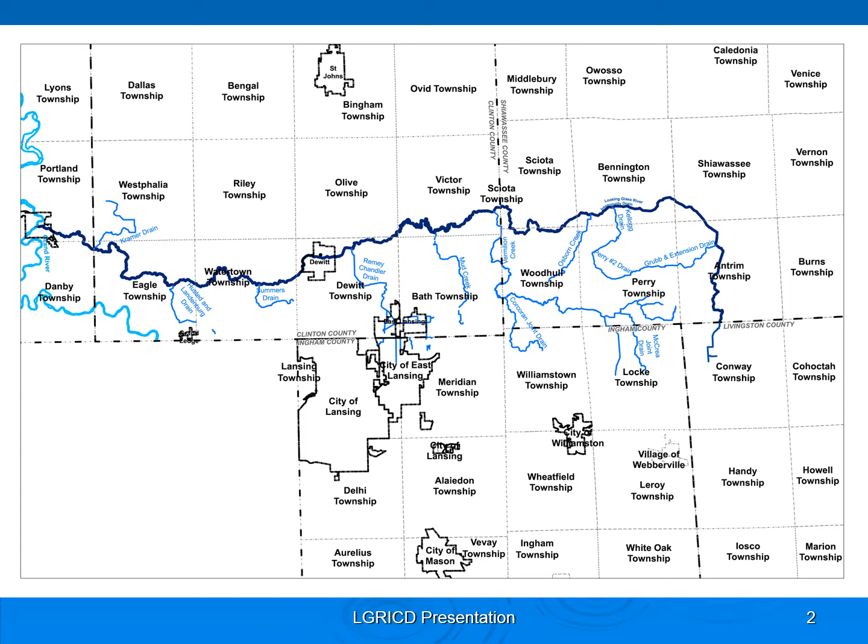The Looking Glass River runs from its headwaters in Livingston County to its mouth in the Grand River at Portland. The river is the outlet for numerous natural watercourses, county and intercounty drains, draining approximately 280 square miles in parts of 5 counties. The river is a resource critical for agricultural, residential, and commercial drainage. It also provides wildlife habitat and recreational opportunities such as kayaking, canoeing, fishing, and hunting.

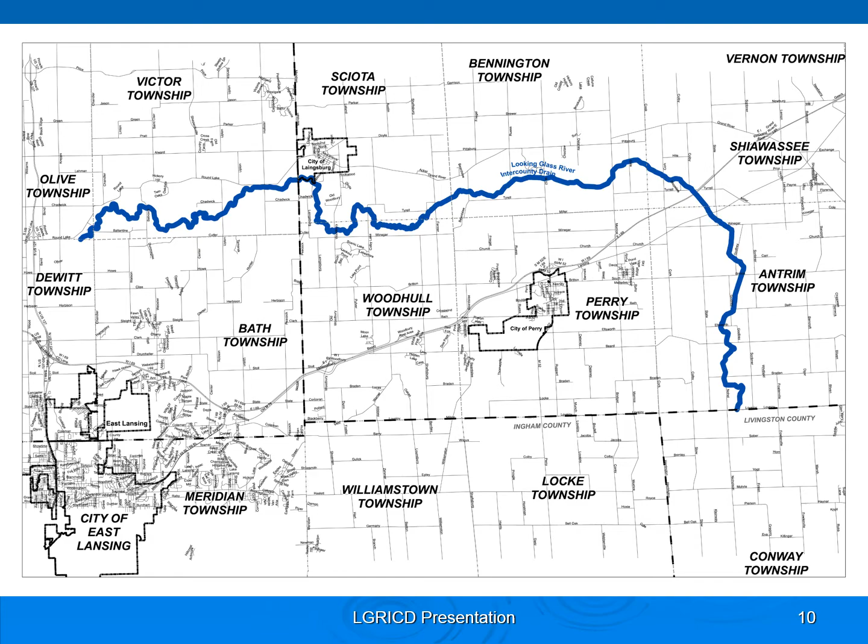The Looking Glass River Intercounty Drain was established by an 1886 order establishing improvements. It is 36 miles in length and includes the portion of the river from the township line between DeWitt and Olive Townships in Clinton County, upstream through Shiawassee County to the county line between Shiawassee and Livingston counties. Michigan's current law recognizes that drains established under prior law remain public drains.

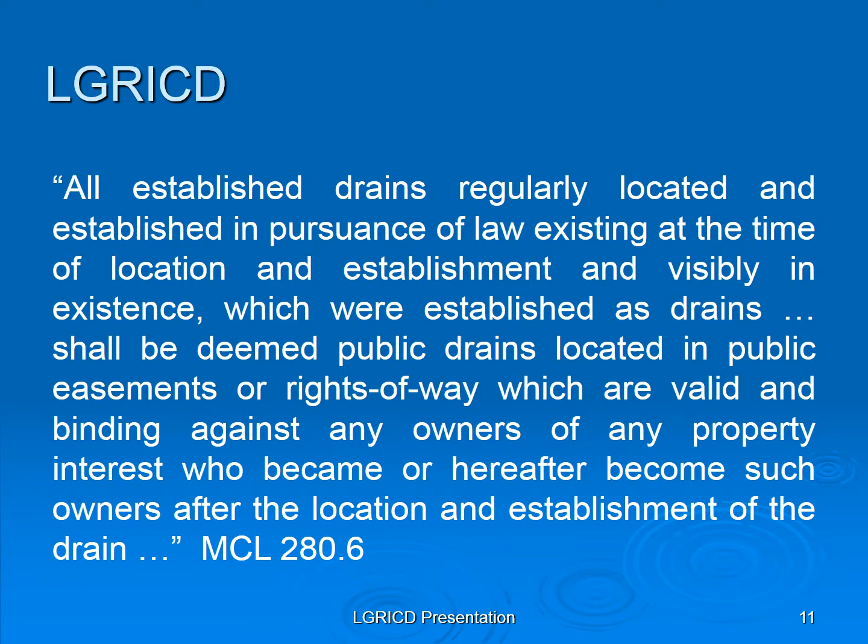The Looking Glass River Intercounty Drain is managed by a drainage board made up of a representative of the Michigan Department of Agriculture and Rural Development, MDARD, as the chair, and the drain commissioners from each of the counties having lands served by the drain. Since the 1880s, there has been a recognized need for maintenance activities on the Looking Glass River. Proposed maintenance activities resulted in a 1944 order establishing a drainage district boundary.

This map shows the drainage district boundary as established in the 1944 order. The boundary is much larger than the established portion of the intercounty drain, shown as the heavier blue line, indicating the need for a district boundary revision. The recommended changes to the district boundary correspond to the reach of the intercounty drain as it was established in 1886. What you see in gold or yellow are the areas of the 1944 district that are recommended to be removed. They are not served by the intercounty drain.

Blue areas are lands that actually drain into the Looking Glass River Intercounty Drain, but were not included in the 1944 district. The lands shown in blue are recommended to be added to the district. The recommended district is approximately 120,500 acres or 188 square miles and includes parts of Clinton, Ingham, Livingston, and Shiawassee counties.

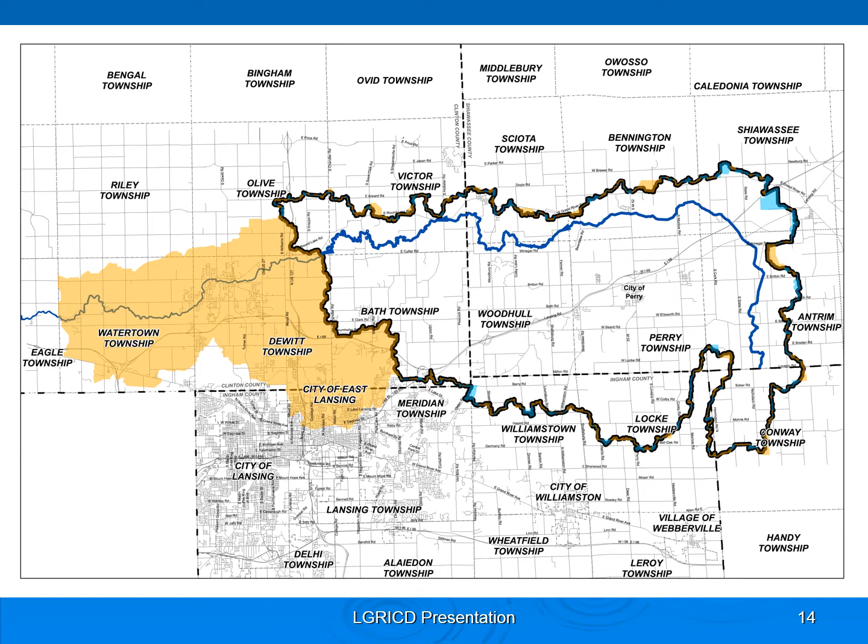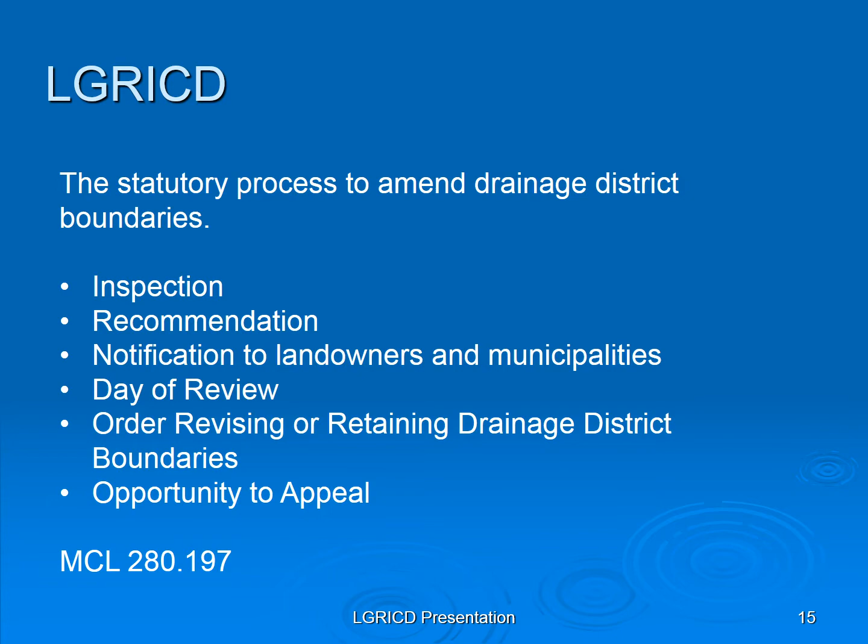When an inspection of a drain shows that the boundaries of the drainage district need to be revised, Section 197 of the Drain Code provides a procedure to accomplish this. In general, this procedure includes a recommendation based on available data and field confirmation, a notification of landowners and municipalities of a pending change in boundaries, a day of review, an order either revising or retaining the drainage district boundaries, and an opportunity to appeal the order.

Available data includes the use of current technology, mapping, and topographic information. This image shows a portion of the Looking Glass watershed LiDAR topographic data highlighted using a hill shading technique. This is extremely useful in understanding the lay of the land and direction of water flow. The red line identifies the ridge line or drainage district divide. The heavy blue line denotes the river. The lighter blue lines the tributary drains.

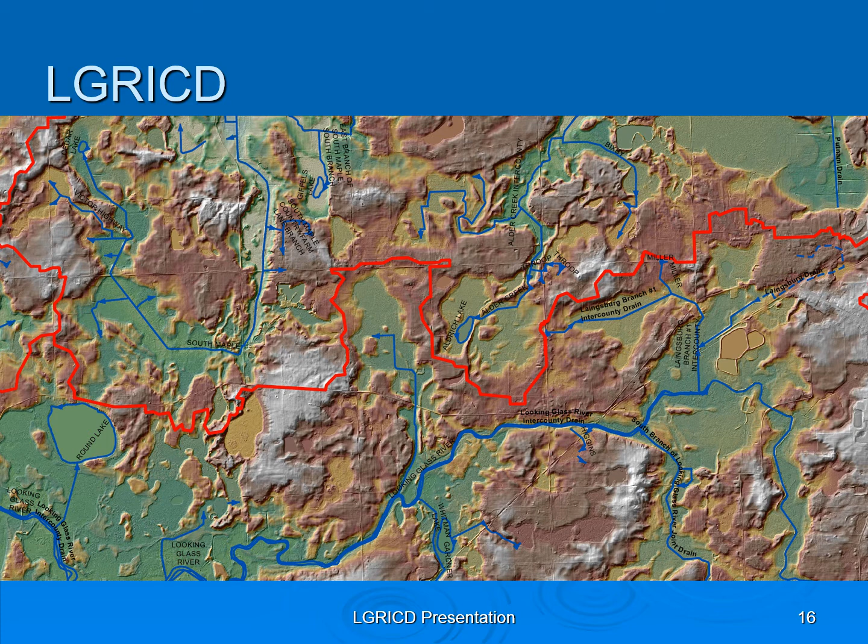Once a preliminary district boundary is identified using available data, it is then confirmed or truthed in the field. A visual inspection determines if there have been local factors that affect the drainage patterns and flow of water near the boundary. These could include such things as structures, earthwork changes, or road building and culvert installation.

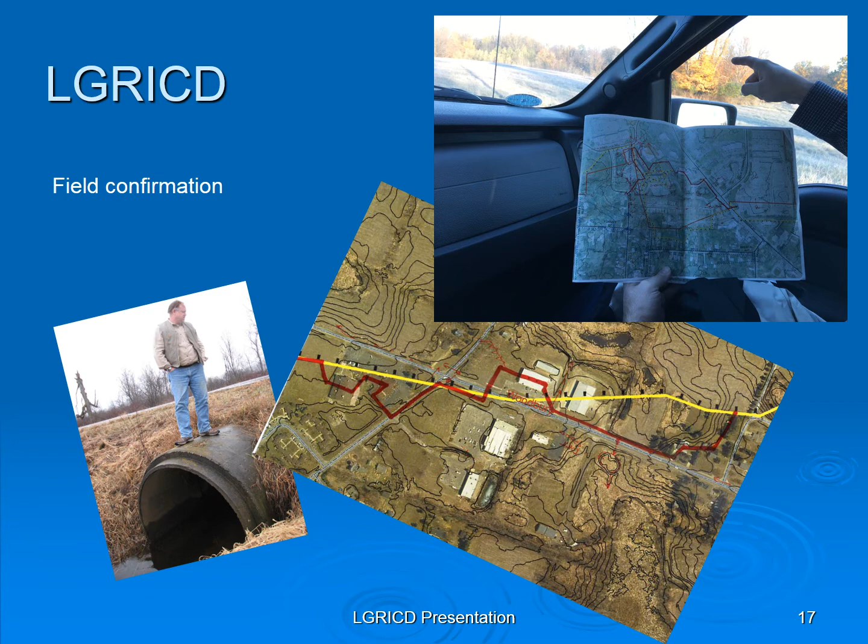Once a boundary recommendation is made, the Drainage Board issues a notice of a day of review of district boundaries. This notice is sent to each of the municipalities and landowners within the district. The day of review of drainage district boundaries provides the landowners with the opportunity to provide input and participate in the decision-making process and share information and local knowledge about the lands involved.

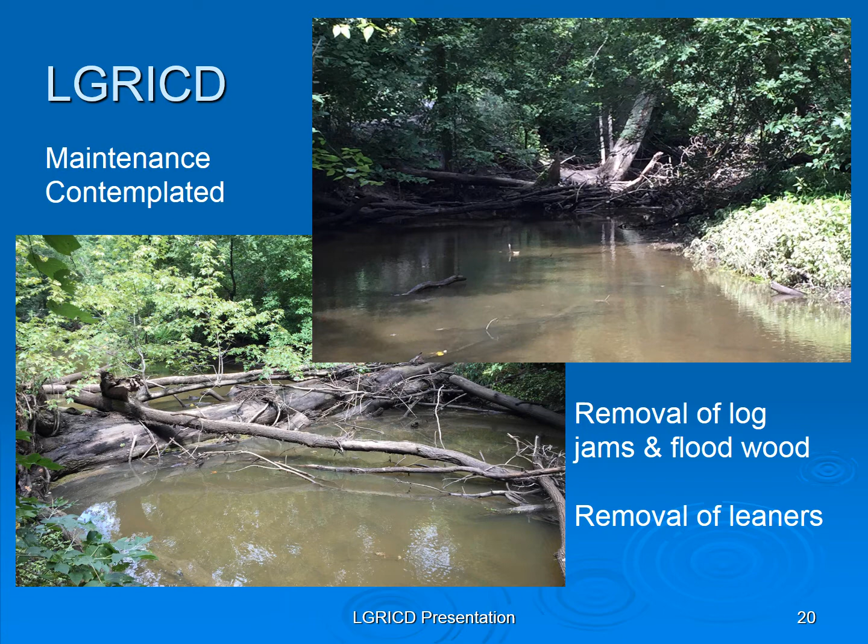Certainly, the condition of the Looking Glass River Intercounty drain indicates the need for maintenance, and maintenance is contemplated. In fact, it has already started. It includes removal of the log jams and fallen trees to allow for the free flow of the drain, and removal of leaners, or trees that will someday fall into the drain. This reduces the need for future maintenance. The first maintenance activities started on a 9-mile reach of the drain in Shiawassee County from near I-69 downstream to Fenner Road.

The work of volunteers is certainly appreciated, but is limited when it comes to the size and extent of log jams. Experience has shown that complete removal of log jams and floodwood improves the flow of a river, particularly at lower stages. It is not unusual to find flow dropped 12, 18, even 24 inches in the channel by removing log jams. In those instances, farm tiles and tributary county drains work more efficiently. This allows the land to dry out more quickly, improving agriculture, roads, and travel near the river.

During higher flows and flooding events, log jams, trees, and other obstructions have less of an effect on flows because the river is already flowing out of bank, through, around, and along its floodplain.

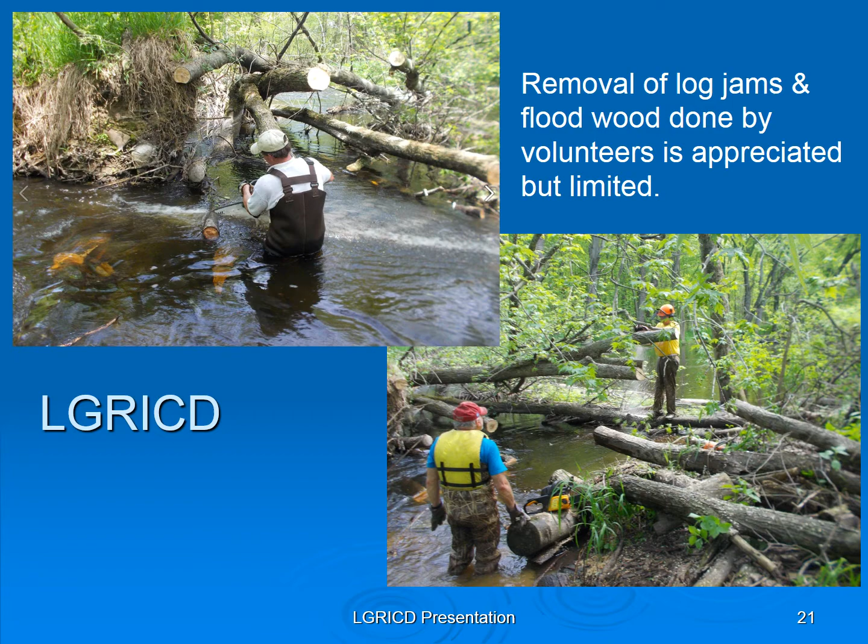Maintenance work bid by the Intercounty Drainage Board will generally be for work by contractors using larger construction equipment. Long-reach machinery, grapples, and similar equipment pluck the floodwood from the river and relocate it to areas where it will not re-enter the river. Selective clearing removes leaners and potential hazards and provides an access or maintenance way, but also saves many trees that don't present a maintenance or access problem. The proposed maintenance is not intended to clear-cut the drain's right-of-way. No excavation is proposed. No landowner or other petitions are required. No MDEQ permit is necessary.

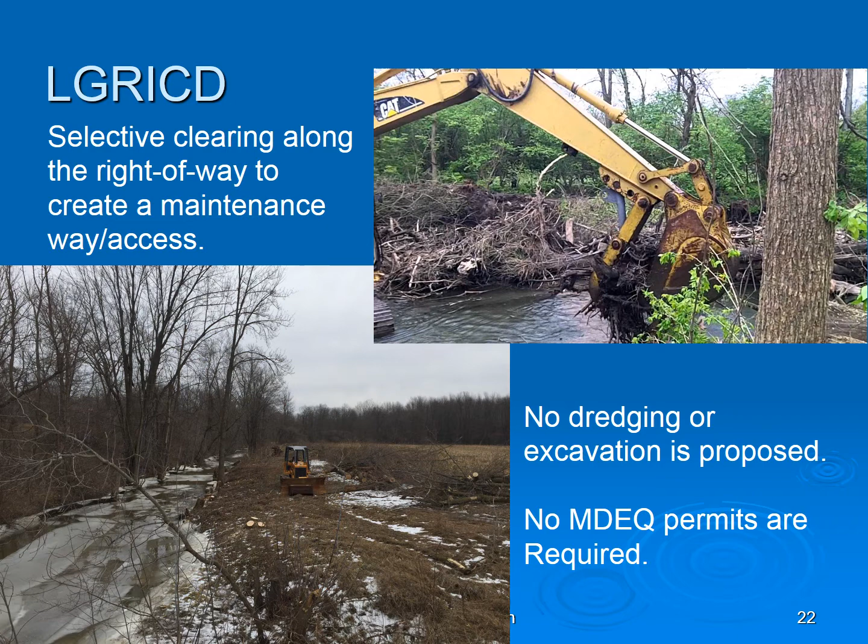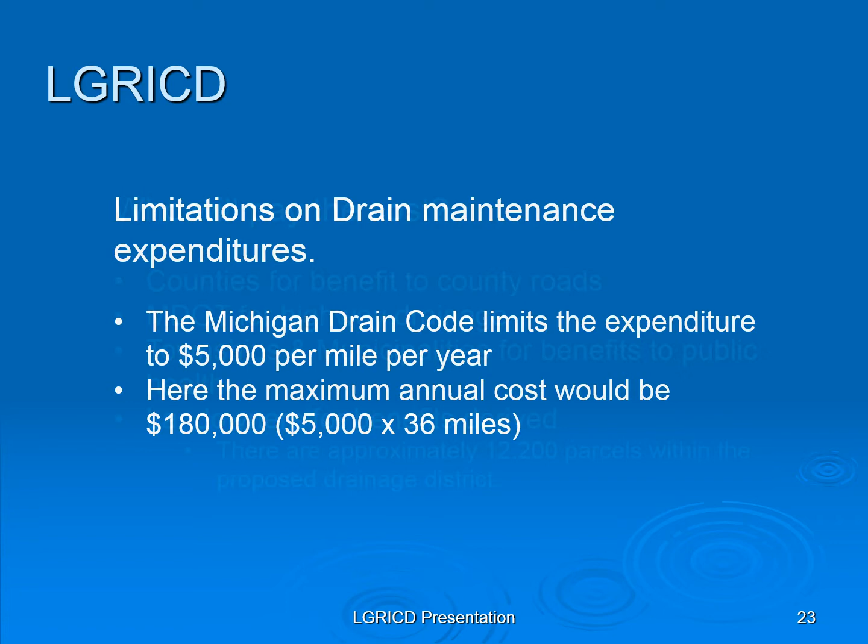There are limitations on drain maintenance expenditures. The maximum limit is set by the Michigan Drain Code at $5,000 per mile of drain per year. In this case, 36 miles at $5,000 per mile limits the annual maintenance cost to $180,000. Who pays for the cost of the maintenance? Counties for benefit to county roads, MDOT for highway drainage, townships and municipalities for benefits to public health, and landowners for benefits derived. There are an estimated 12,200 parcels within the proposed drainage district.

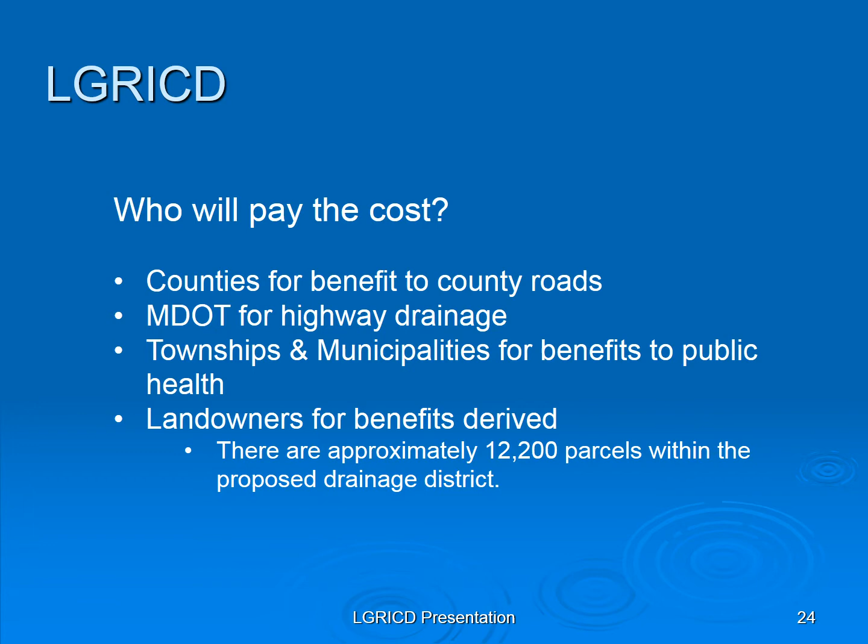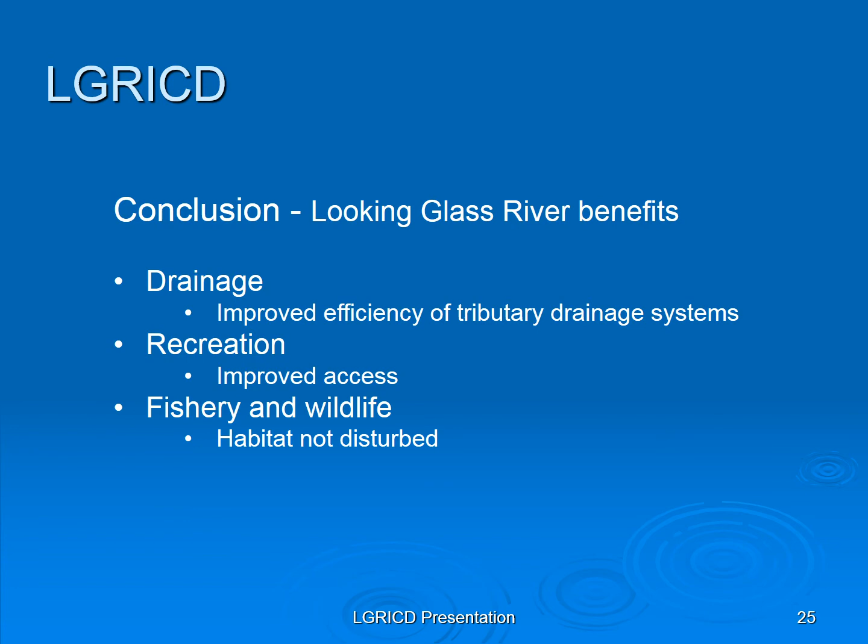The removal of trees, log jams, and floodwood from the Looking Glass River Intercounty drain has a direct benefit to drainage generally and agricultural drainage specifically. Indirectly, the maintenance benefits recreation by opening previously inaccessible portions of the river, lengthening portions open for recreation, and reducing dangers to boaters, kayakers, and canoeists. Because the river bottom will not be disturbed, the fishery and habitat will not be disrupted.